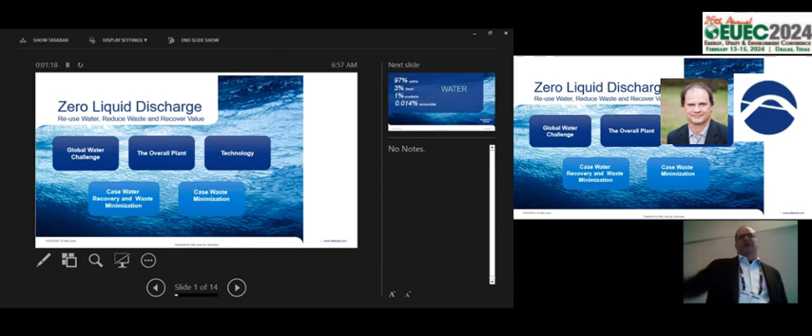So I'm going to talk about zero liquid discharge, and specifically we'll go into a little bit of flue gas desulfurization, some of the new rules that are coming out, which are going to be pretty important to the power industry. This talk can be taken for any industry as well. What we're talking about today can be transferred pretty easily to other applications.

The first thing, zero liquid discharge, why it's all important. We all know these numbers. They're pretty easy to understand. Most of the water on Earth is salt water. Of the fresh water, very little of it is actually accessible for us to use. So water conservation and water reuse are really important factors for any industry, specifically if there's legislation coming that's requiring this, also depending on the region of the world you're in.

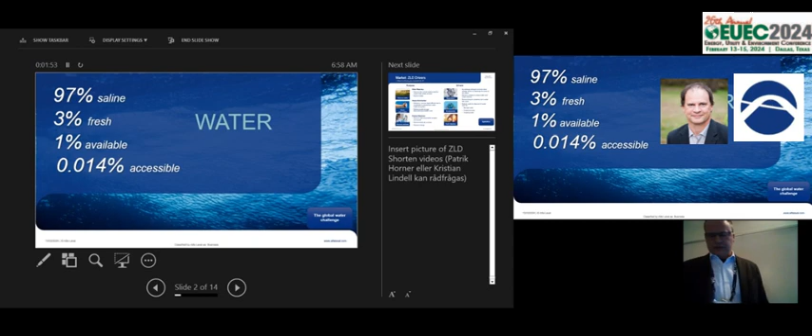What drives ZLD? Again, we know these: water recovery, especially in places where water is a very scarce resource. Even in the U.S., the western states see it much differently than the eastern states, specifically in power as well. Waste minimization: ZLD can be used for reducing the volume of wastewater coming in, so you can evaporate off the water, take out volume, and still leave a slurry or a highly concentrated solution for disposal.

Product recovery: we're going to talk about waste streams, but this is actually very valuable in process streams as well. One of the large industries we're in is lithium, using the exact same technology to crystallize salts, lithium hydroxide, lithium sulfate, for battery grade lithium that goes on to further processing for batteries.

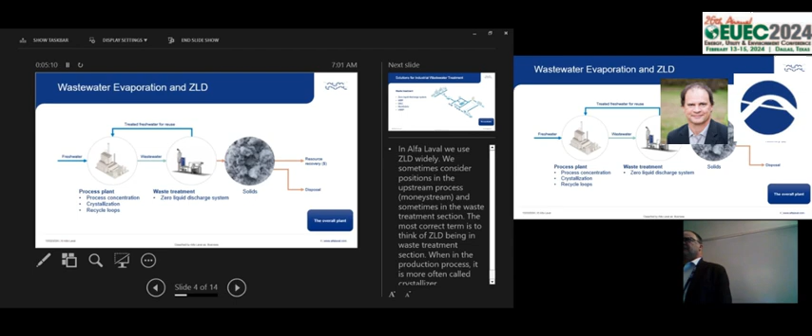Again, the main thing here is to understand there's a difference. There's chemical, there's physical separation, then there's thermal. Thermal is the most expensive form of separation because of the energy required. This slide here is what I would say is a typical process layout. As with RO, you're going to want pre-filtration and softening in front of your evaporation systems.

And I'll go into, we can talk a little bit, but try to keep this kind of on track and moving. You know, our systems can handle suspended solids in the feed, and I'll go into why we do that and can. This is a typical process flow for a wastewater plant.

You have the water coming off, you have different types of mechanical and physical and chemical treatment through here. Then you've got biological, RO. We're taking the RO reject. You just mentioned, and this is unplanned, by the way, what to do with the RO reject. So I've got some mass balances and flows here in a minute, you'll see.

So you can have 1500 GPM and you can still have a substantial amount of reject, highly concentrated salts, and even some TSS, or for RO it won't be TSS, but highly concentrated TDS. That's what we want. We want the highly concentrated, highly corrosive, ideally you don't want high fouling, and there's ways to handle that. But that's the waste stream that the evaporation systems are going to take through ZLD.

I want TDS as high as you can get it. 20%, 30%, 30% would be past saturation. So then the strategy is to basically use as much existing off-the-shelf technology before you get to our system to reduce the volume you're having to treat, thus reducing CapEx and OpEx through energy. And I've got some more mass balances and process flows.

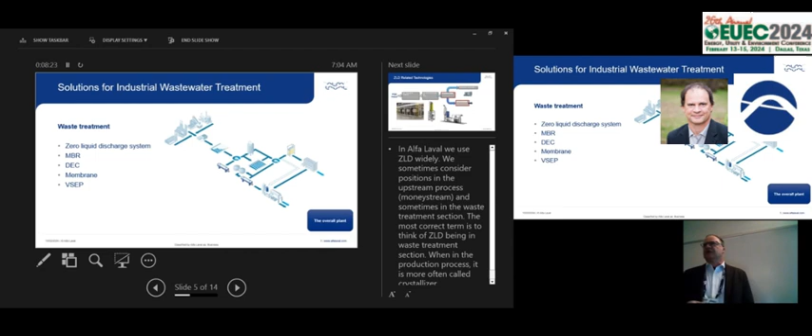I also want to be located where any waste heat is, because I can use waste heat to evaporate the water. And that's a very, very real proposition. So if I'm at the end of the wastewater plant, sometimes it is so difficult to get waste heat that maybe you're sending to cooling towers or other processes. I can pull that heat out of the fluid, send it in, and help this. So just keep in mind that you don't have to place your ZLD system at the very end of your process.

Technologies, which you covered a little bit for me, David, that go in front of ZLD. Obviously, softening, because you will have scaling. Scaling and fouling are probably the biggest concern of people looking at this technology. Having said that, there are ways you can handle it. If you have a high scaling or high fouling application, you can always look at softening in front of it. That does a lot in the projects we have with UCC. Those are all the things we're looking at.

You can look at selective types of membranes. You have RO here. This is for concentration. One of our partners that we do a lot of work with is this company out of Reno, Nevada, called New Logics. They make a VSEP membrane, which is written into the EPA rule for flue gas. I've known these guys for well over a decade. Their products are pretty unique. This membrane is an RO membrane. They also have UF membranes, but they don't foul.

The entire membrane surface oscillates, vibrates, and thus it's very similar to cross-flow filtration where you have movement across the membrane surface, preventing fouling. So this technology is actually written into the EPA rule as preferred technology or best available technology to do this. They work great with us. Unique feature too, this membrane can handle suspended solids in the feed. And that is what makes it different than all other membrane technologies in the world.

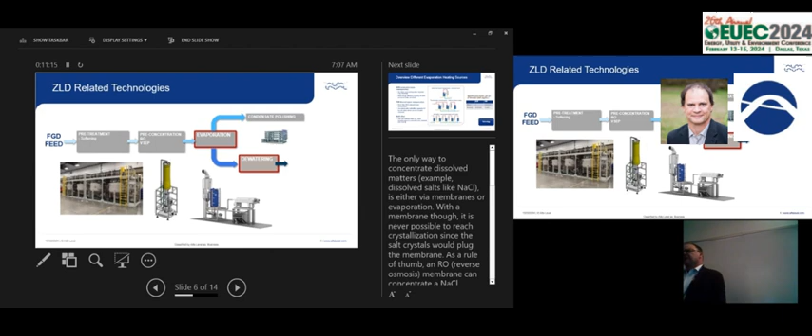Typically, the distillate coming off these systems, you can expect 50 to 100 ppm of TDS. Sometimes you get more, it depends. We can get down to 10 to 20 ppm of TDS in the distillate, depending on the application and how we configure the separation vessel. Your solids coming off will go into a decanter for dewatering. I'll show you some pictures on that in a minute.

Types of systems, there's 3 types of systems. Mechanical vapor recompression. Most of the time this is where people want to go, since they don't have excess steam or enough waste heat to run the system. If you're going to run with steam, you either have to have excess steam or the capacity, or you put in a boiler, then it starts to run.

So with mechanical vapor recompression, we use a mechanical vapor recompression fan that drives the evaporation. So this is a one effect. This fan is the energy we're putting in. As the system starts up, it starts evaporating. You're going to produce your vapor coming off the top that gets recompressed with the blower and sent back into the system. So they're pure 100% electric, minus a little bit of startup energy.

Thermal vapor recompression, this is medium pressure steam coming in to our system. Obviously, the customer has to have this. Then we pull a certain percentage of the steam coming off the first effect and recompress it through this. It kind of looks like a venturi, there's no moving parts to it, so it's very, very inexpensive to run. And then you add multiple effects.

And then we have multiple effect steam or waste heat. This can be waste heat we're pulling from another part of the plant through a heat exchanger, right? Send that in, and we can evaporate. Multiple effects are used to reduce your energy costs, so every effect you add reduces the required input of energy.

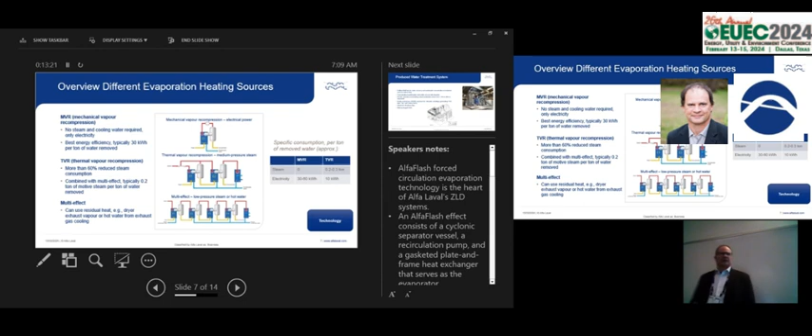The case study I want to talk about today is actually a produced water case study, but the water chemistry is extremely relevant to flue gas desulfurization. You're going to have all the same constituents in it. This is a produced water facility, pure 100% ZLD facility in southern Italy. We commissioned this plant not quite 2 years ago. 8 tons an hour evaporation capacity.

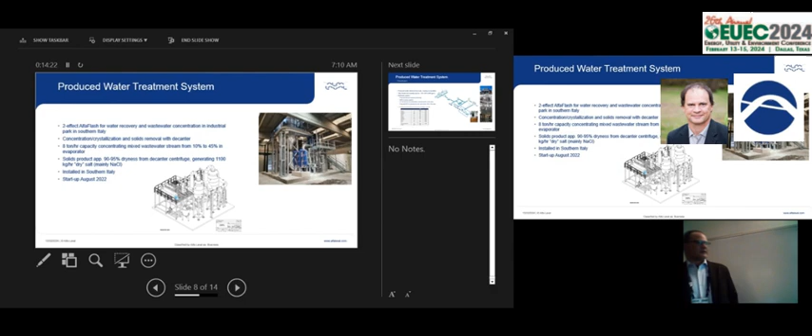In evaporation, we're talking tons of water evaporated, not GPM, not barrels or anything like that. You can do the conversion pretty easily. So 8 tons an hour capacity, the feed coming in is 10 to 45% TDS, installed in southern Italy. That's actually a picture of the facility, a picture of the install. That's the diagram, and that's the actual install there.

Again, you see the process layout is very similar to what I had before. They have lots of clarification. They have biological treatment to get the organics out. You want the organics out; that will affect your solids quality and crystallization. And then they go to RO. We're taking this highly concentrated waste stream straight into our evaporation system.

The feed coming into the plant is 100 cubes per hour, which is about 440 GPM, and what the evaporation system is getting is 8. So it's a significant reduction, right? That's typically what you want to look at. And in flue gas desulfurization, it's the exact same way. You want to use as much conventional clarification as possible, and that concentrated waste stream is what we want.

You see the water chemistry here, sodium. That is not very good on the eyes. Lots of magnesium, high scaling, high fouling applications. Materials of construction of this are titanium. So it is corrosive, but we have lots of materials of construction. We go up to nickel, titanium, and those alloys, Hastelloy and stuff. But in this application, it's going to be titanium.

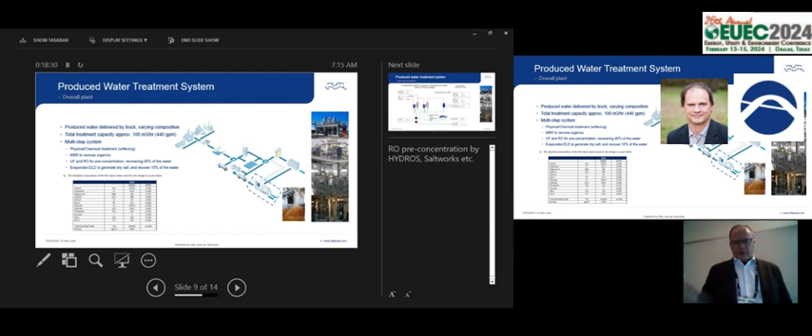This is the mass balance and process flow for the thermal vapor recompression. You have makeup steam coming in, first effect. When you're doing zero liquid discharge, any type of thermal separation, maintaining and recovering all the energy in the system is really critical, not only for operation, but economics. We might overlook power because of its relative availability. It's still important to recover. So we have preheaters here.

The condensate coming out is actually used to preheat because it will come out close to evaporation temperature. I can't read those, too blurry. Say we're evaporating at 80 C, that distillate coming out is going to be really close to 80 C. We want to use that to get the feed as close to 80 C as we can going into evaporation, because we want the evaporator's energy going into actually evaporating the water.

The other thing we do to reduce scaling and fouling, we do not evaporate inside the plate heat exchanger. There is no evaporation, because evaporating on a surface will create scaling on almost everything. We flash evaporate inside this vessel. So forced circulation, flash evaporation. I forgot to mention that earlier.

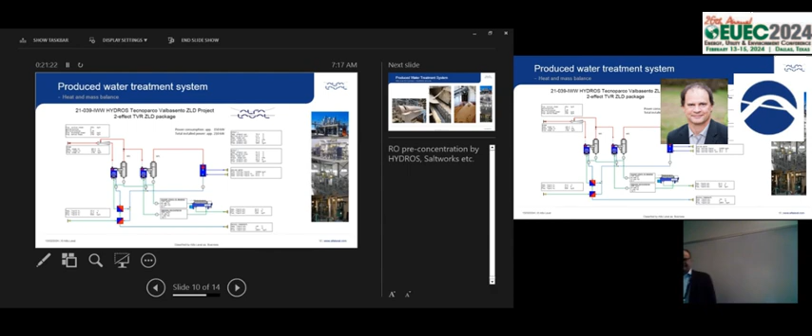This vessel is designed for separation. You want your vapor going up and your water coming down, so these are pretty tall vessels. If you have carryover micro droplets getting pulled with the vapor, we put in demisters. In this application, I think they used some anti-foaming, and that solved their problem. 150 ppm of TDS is cleaner than anything coming into the plant, so still very manageable. We typically say 50 to 100, but we can get it down to 20 with demisters. Solids coming off were 90 to 95% dry, which is pretty good for salts.

Let's see here. There we go.

So in this application, the salt quality changes as the customer comes in, so there's variation in the feed. The salt some days will be red, some days it'll be white. So keep that in mind. They can handle variations, and the process is designed for it. And I know in flue gas and coal plants, you'll have the same kind of coal coming in over time, but you'll have different sources. So that is something that they can handle.

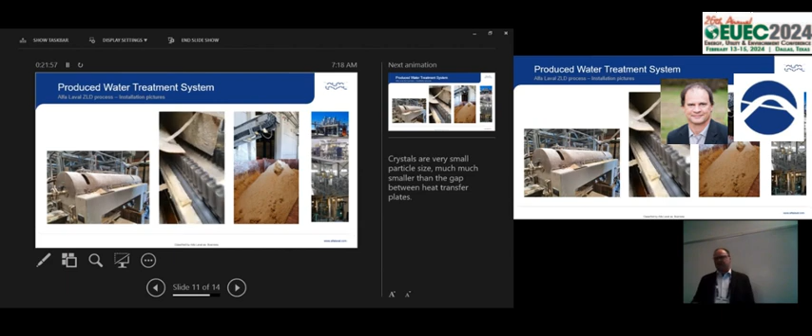Alright, so that's that. Going back to some of the technology, I'll just go over this real quick and then I'll be done. This is a mass balance form of the VSEP RO membrane. Again, I want to show you that equipment. When you think ZLD, you want to reduce the volume going into the evaporation system. It's just pure economics. The energy put in to evaporate is so high.

This is a feed coming in. This is an FGD application. Sorry, this is so tiny on here, we'll just go high level. So basically, feed coming in. This is the reject stream. So I want the reject. This is literally what goes to the evaporation system. You have the permeate coming from, this is probably a stage 1. This is probably ultrafiltration. I mean, it actually is.

And that will pull out all of your larger ions and stuff, maybe a loose RO. That will then go on to a next stage of RO, and the final stage will be a spiral. But in this, you get your reject, it comes back, goes to the feed. This is the reject that I'm taking. So you can see, you can take this from 155 cubes down to 29. So it goes into the size of the system.

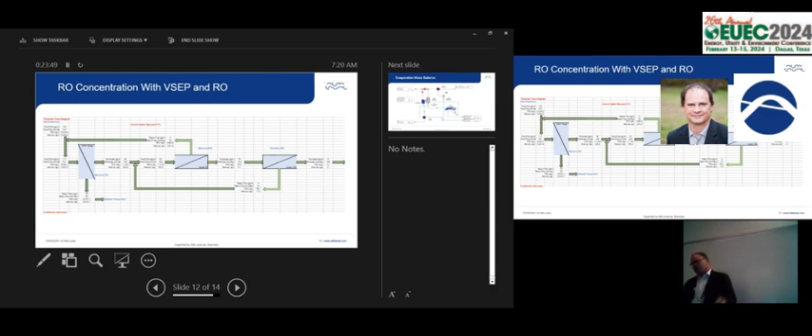This is a very compact, easy system to use. We make fully turnkey systems that are plug and play. We're Swedish, so we always talk about IKEA. We assemble the plants in our factories, disassemble and put them in containers, and they show up on site for people like you to put together. So again, this is mechanical vapor recompression instead of thermal vapor.

So the only input is to start this up. Where this says some incoming steam, if you don't have steam, we just put electrical preheaters in there and you run it. These systems are extremely easy to start up and shut down. There's no additional labor. You'll have one person monitoring it in an MCC during the day. 30 minutes to an hour to start up, and 30 minutes to an hour to shut down.

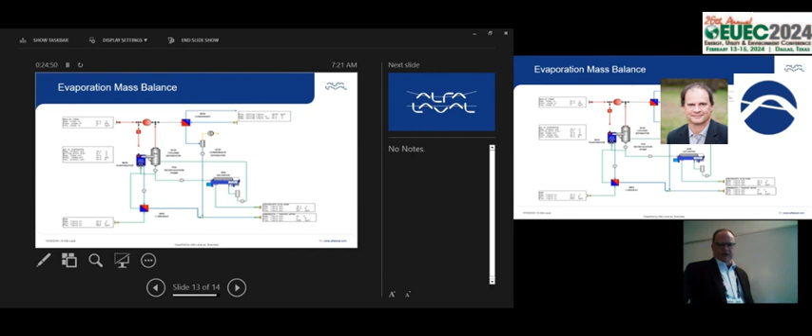Plates: we have customers that ran 6 months, opened up their plates to inspect them, changed their chemical program a little bit, and went from there. We have customers that have been running these for 3-4 years and they never even open up the plates. You can also tell from your flow; there's instrumentation on there that will tell you when you need to go into it.

Questions? That was a lot. I talked fast. When you go into a shutdown, do you struggle with material precipitating where you don't want it to? If you do it right, you won't. When you're shutting these down, you obviously have high concentrations, you have saturation. There's obviously drains at all the low points. You want to drain it. Sodium chloride is not as big of a deal. Sodium sulfate, that's bad. Trust me, I've been there.

Yeah, me too. So it's just flushing it. There's CIP built in as well, which I didn't cover. For CIP, you just isolate the heat exchanger, add your CIP chemical, recirculate for 30 minutes to an hour, then drain that, fill it back up, and start going. So the way the systems are shut down, a lot of customers have a couple of manual valves they go out and change. You can do automated, but it's up to you.

You'll drain the system. Ideally, it's really good to flush the system with fresh water. If you're shutting it down, clean it at the same time. And from all the lessons learned from customers that buy the components themselves, you want all your low levels, your dips, and all the low lines to have drains on them, all of them, which we designed in as well.